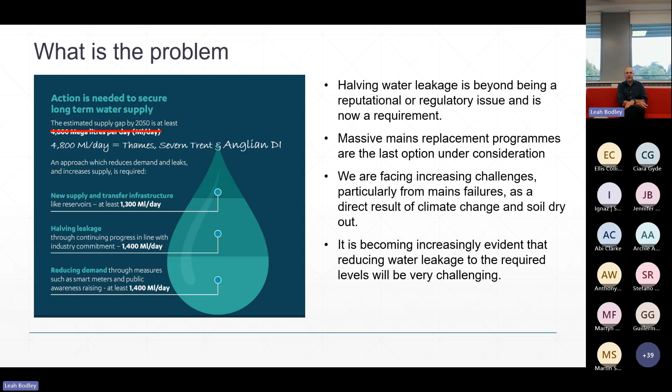We're facing increasing challenges at the same time. So we're trying to drive down leakage, and yet climate change is drying out the soils, and we're seeing massive mains failures in the summer as a result of soil dry out, and in the winter where we're getting winter events coming through. So it's a really challenging time for leakage at the moment. It's becoming increasingly evident that halving water leakage by 2050 is going to be really, really challenging indeed. So how do we do it?

What we try to do is look at all aspects of leakage, and we use the PALM acronym to describe that. A lot of people say, oh yeah, there's a silver bullet for leakage. No, there is no silver bullet for leakage. In order to manage leakage properly, you've got to be able to do all four of these brilliantly.

Stop the leakage breaking out in the first place. Become aware of where it's breaking out, and that may be in a geographic area - it may be on your distribution mains, on your trunk mains, on your storage reservoirs, in your customers' houses. We've got to be aware of where the leakage is actually happening so we can go and look for it. Then, of course, we've got to find it - that's a job in itself, actually locating the leakage out on our mains or within a customer's property. And finally, we've got to mend it and come up with repair solutions.

I often say we still use the same repair solution that the Romans used, which is dig a big hole, cut out the bad bit and piece through.

Our research has shown that most of the work going on, most of the innovation, is actually in that awareness and location area. About 70% of company projects across the country are in those areas. Mend solutions is the area with the lowest amount of research - it's really hard to bring new innovations into that area for a number of reasons.

Really interestingly, our regulator now uses this same PALM analogy. What happened was that when they asked us to put in our PR24, they said break down your costs, tell us how much you're going to spend in each of these areas. By putting those figures together, and these are all publicly available on company websites, we now know that 52% of the leakage spend is actually on repair.

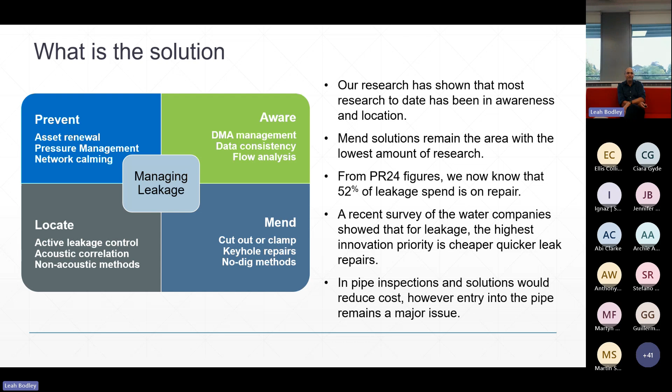I did a recent survey of the water companies and said, look, I want to know what the innovation calls are at the moment for leakage. They went out and came back with a number of calls. I said, brilliant, fantastic, now rank them, tell me which ones are the most important. What was really interesting is straight away, the highest priority came out as being cheaper, quicker leak repairs. We've got to come up with better ways of mending our pipes. So how do we go about doing that?

My son plays chess, he's pretty good at it, and when we play together he regularly beats me. In fact, I can't remember the last time I beat him. What he does at times is move a piece and I think, why are you putting that there? Then about four moves later, I'm suddenly in checkmate and I realize why he did that. It's this idea of putting something on the board and going, I'm not quite sure how this is going to work, but I know that in about four or five moves time, I will need that.

When we look at innovation, sometimes we're trying to solve problems we've got right at the moment, but other times we look over the horizon and say, okay, what are we going to need to solve in a few years' time? What problems are going to be coming up?

When we started doing this, we didn't know what the issue was going to be in terms of leakage and in terms of mend. We started discussing this project a couple of years ago. The UAP is really one of these chess move ones, where we said, a few years back, look, we think repairing pipes is going to be increasingly important to this industry. So how do we help do that? How do we help with the inspection but also the repair and dealing with that side? So we decided, okay, we'll put a piece on the chessboard, we're going to see how this one works.

What's been really interesting is over the two years, a year of discussing it and then a year of actually working on the project, there's been a dramatic swing in the desire for solutions in this area. We've really seen the whole industry turn around and say, okay, we're pretty certain we've got awareness and location stuff now, we really need to focus upon mend.

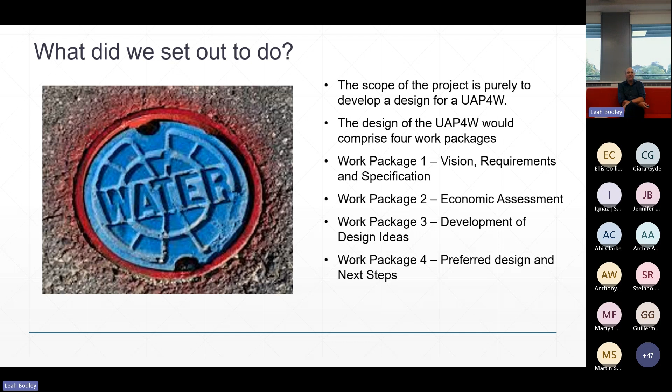But very quickly, have we succeeded? Well, we've completed a thorough needs assessment for the UAP. We really understand what it needs to be able to do. We've developed 4 potential designs. And then what we did is we took those 4 designs and we refined them down. We said, okay, we've now got 2 candidate projects. We've got 2 that we really think summarise what we want to do with this UAP.

We've identified a potential route to market. So what we've been able to do is go, actually, these designs, we can see complementary technologies that exist in the industry that have never been thought of as being useful for inserting things into the pipe in terms of robots and inspection devices. We think those can now be adapted. So we think our work will build upon existing equipment out there and say, look, we can take these, adapt those, and use those within the industry in order to solve this issue.

So we're now going to be entering into discussions with manufacturers, and one of the reasons we're doing this webinar, and we're doing this slightly early because we've still got a few bits left to finish off on the project. But one of the reasons we're doing this webinar now is we want to be able to share this information because we're going to be entering into discussions with the manufacturers.

And what I'm going to be asking them to do is, before we meet with you, is that you review this video. So I'll say it now. If you're one of the manufacturers who we're going to be talking to, thanks very much for actually watching this through. It's going to help our discussions an awful lot when we come there, because you're going to understand exactly what we've done, what the process was that we've gone through, and what the problem is that we're trying to solve.

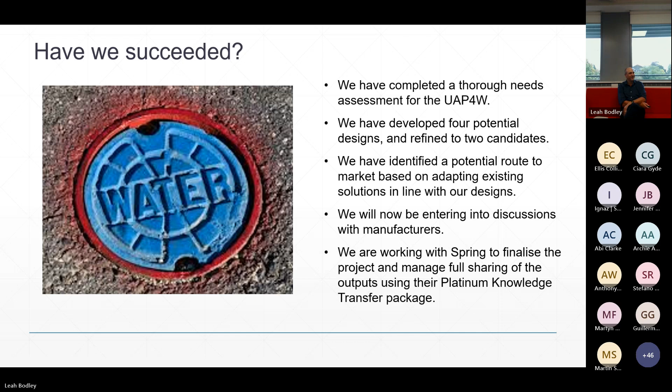We've got relatively limited time today, so we're going to give you a flavour for what the work is like. Everything you hear about and all the detail has been documented in the reports we've produced throughout this work, and they'll be held centrally by Spring. So if you want more detail, that will all be made available in time, and as Jess said, we're just wrapping up some of those.

I'm not going to talk any more about setting the scene, Jess has done that, so we're going to jump straight into the project. We're going to start by talking about current practice, vision, challenges and specification. This is where we started just over a year ago. This project's been running for just over a year, we started back in September.

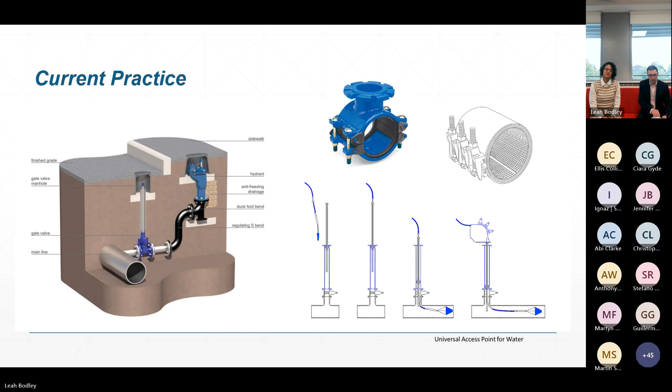As was said earlier, a lot of this project was around workshop and stakeholder engagement. One of the first things we did in those workshops back in October and November was to ask stakeholders - water companies, supply chain, academics, researchers, consultants - what was their vision for a UAP. On the screen I've summarised some of the feedback we had from that workshop.

A really key point made in that first workshop was that the project should focus on the core functionality of a UAP - don't get distracted, don't increase the complexity to try and encompass other devices, accessories, or functionality beyond the core access. Leave that to the suppliers who will be delivering the technologies - they know their technologies, and in future they will develop those additional solutions, whether that's for deploying a technology, capturing a technology, or whatever. So some of the key comments there are around the vision.

So unlike fire hydrants, this should be for use by water companies and their contractors only. It should be low maintenance, easy to install, it should work on compact materials, in a standard chamber size, and it should reduce disruption for customers. Pretty obvious things, but it's a good point to start in terms of a vision.

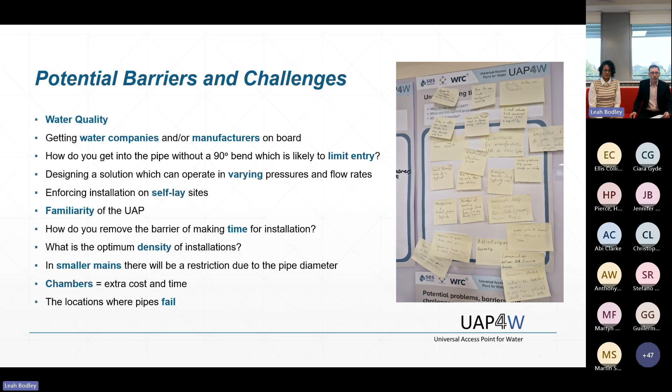As part of this early workshop, we also did an exercise, a MoSCoW analysis, and MoSCoW stands for must-haves, should-haves, could-haves, and won'ts. This is about identifying for the UAP what should be included, what could be included, and what shouldn't be included. We did a big exercise there, lots of post-its. From that, we refined that down and developed a design specification for the UAP.

For each of those items that we developed on that design specification, we had either a preferred and a minimum requirement, or just a minimum requirement. I've highlighted some of the points here, and I'm not going to go through this. This is available, will be available as part of the reporting.

But you can see some of the very obvious things around water quality, Regulation 31, some of the things around design features in terms of the access, the diameter of the access point. Things around installation, different pipe sizes, materials, cost.

Cost was a really interesting one because actually installing hydrants, the hydrant itself is not a high value item. So we've specifically said that the cost should be associated with the quantitative or qualitative benefits that can be derived. I think the wrong angle would be to make a direct comparison with existing technologies. This is about enabling more from the network.

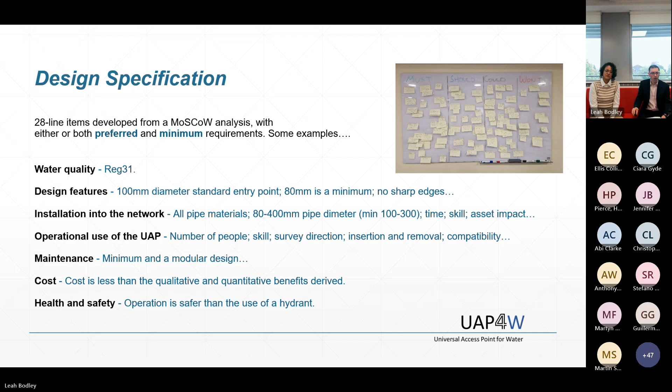I'm going to pass over to Camilla to talk about the economic assessment.

So hello everyone, I'm going to spend the next 10 minutes talking about the economic assessment of the universal access point. I will try to cover as much as I can, however I won't be able to enter into too many details because it was an extensive task. But if you have any doubts, just let me know so I can clarify anything by the end of this presentation.

So the main objective of this work was to provide a comprehensive economic evaluation of the UAP for the water industry in the UK, with the focus on potential benefits, use cases, and demand estimates. Here it was a mixed approach using both qualitative and quantitative analysis for us to understand the feasibility of the UAP adoption in the most important perceived use cases by the water companies participating in these studies.

So here, the first task was the qualitative analysis, which was a mix of surveys and scoring systems in which we wanted to understand and assess the perceived benefits of the UAP in the water sector. Regarding the use cases, we wanted to understand the most important UAP applications.

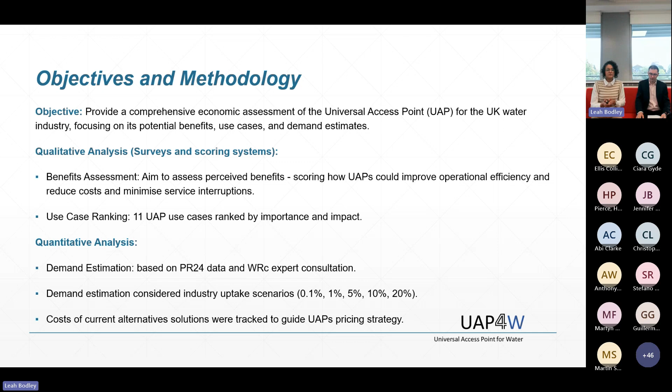Regarding the applications, the use cases, the top three better ranked ones were pipe condition assessment, access for robotic sensors and devices, and network leakage - the installation of UAPs within district metered areas to improve leakage management. The least important use case considered here was for new development.

So the respondents thought that the UAP could have a huge positive impact in the long term, but not really in an immediate perspective.

So why have we done this qualitative analysis? It was to guarantee that the demand estimates, the numbers, reflect a real world industry priority and are rooted in actual needs. We didn't want our UAP demand numbers to be just rooted in hypothetical situations or a very rooted analysis based purely in modeling and calculations. We wanted to bring the views of the water companies into the methodology for this calculation modeling.

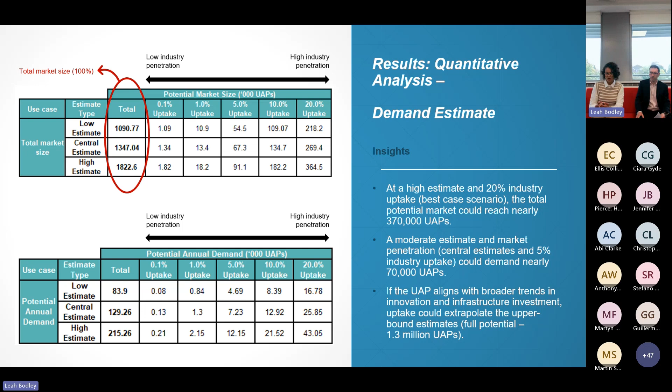So we have here just some conclusions drawn from these two assessments. First, we can see that the use cases related to proactive maintenance in distribution mains were perceived as the most important applications for UAPs, and together they account for nearly 68% of the total market size.

This tells us that we have potential for moderate to high adoption of UAP, especially if it aligns with good market conditions. But of course, adoption will depend on competitive pricing, especially during early stage deployments. So it's important to benchmark the UAP against the cost of alternatives raised in this study.

We've noticed also that the perception of UAP benefits varies across water companies, reflecting different operational needs. So we need to keep talking to the water companies to guarantee that their specific needs, or at least the most common ones, are covered in the final design.

As the qualitative study told us, priority should be given to high impact areas such as pipe condition assessment and leakage management. As a next step, consultation with future UAP suppliers and stakeholders is needed to refine the design and to set up a pricing strategy.

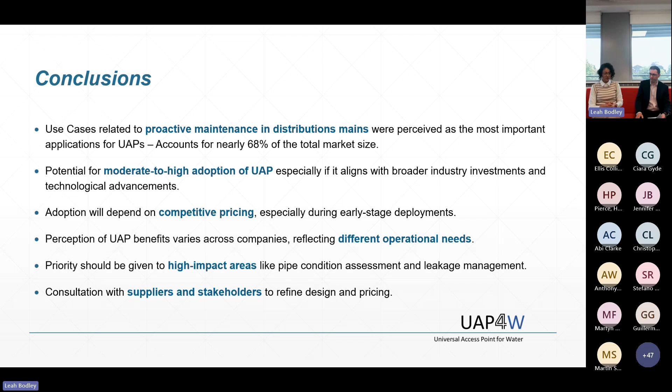So we're now going to talk about the main part of the work that we've done, which is the development of the design ideas. I've talked already about stakeholder workshops and engagement of a wide range of different organisations and people. I wanted to make the point here that we actually involved quite a few graduates at WRC, relative youngsters to the industry.

It was really refreshing, the alternative, challenging thinking that they brought to this. I think sometimes we forget that we know an awful lot about the industry and we're a bit blinkered. So a key point is that people who don't know about the industry come with fresh ideas that can be really useful to this sort of idea development process.

So the objectives for our design development work were to develop a number of design ideas based on the specification, and engage with stakeholders. WRC developed the initial ideas, but this wasn't about WRC just developing ideas - it was about stakeholders reviewing, challenging, scoring, and ultimately agreeing on the aspects and the designs that we would take forward.

I'm going to talk through the 4 ideas that we developed to an initial stage, and we're going to go through each of those in turn now. There's a slide on each of them. They're all a bit different at this stage. Remember, we're coming up with different ideas - we're trying to challenge the norm, trying to think of different things to do.

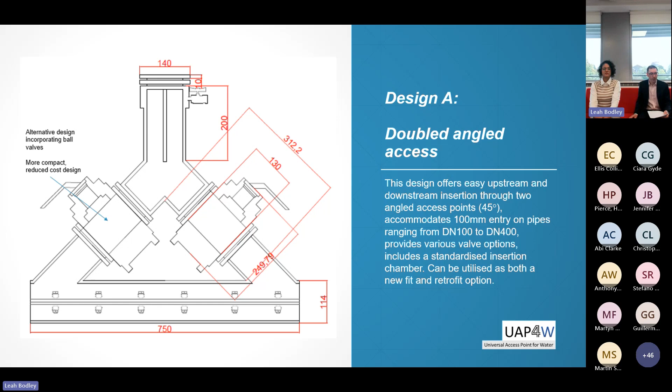So, design B. They're completely different.

This design is based around actually putting a slot on the crown of the pipe along the pipe, and then using a ball valve and using the central hole through the centre of the ball valve to provide some directional capacity, either upstream or downstream of the pipe.

This provides some direction. Again, this is shown as a repair clamp type design, but like all of these designs, they could be manufactured as a piece that is cut into the pipe with flanges.

Some of the key points that were raised in discussion on this one: how do you make the slot under pressure? That was one of the challenges and one of the questions, and something we did look at later in the project, which I'll cover in more detail. Concerns over putting that type of slot, that type of access, on PVC or AC pipes.

Installation, again with the slot, would require specialist training, and there was a very valid point around a ball valve may not be considered suitable, and you may need a secondary valve on top of that for long-term deployment, or some way of locking it off. The ball valve wouldn't be considered as appropriate valve type.

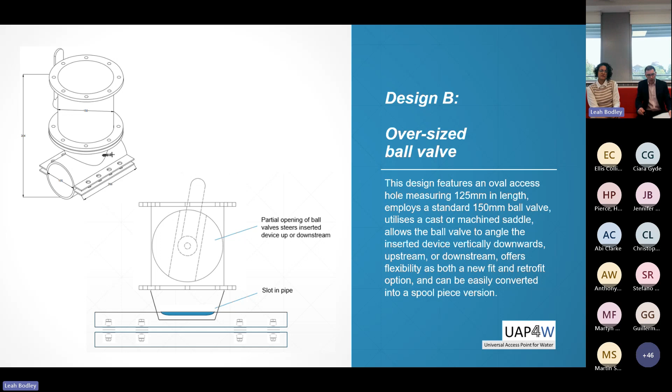So that's design B. Let's move on to design C. This one, again, quite different. This one focused very much on the issue with a cut edge.

So if you tap into a pipe, if you drill out a pipe, you end up with a very sharp edge on the host pipe. How do you deal with that? This approach, again, is shown as a repair collar type approach, but it has a sleeve that goes down and protects whatever you're going to put in from that cut edge.

This design here has a valve that sits on top of the sleeve. It also shows some potential optional tapping locations.

Some of the feedback we had on this design: small, simple, people liked that. The valve needs to be bespoke in this current iteration, so there are some modifications needed to the valve.

The tappings, people thought they probably weren't needed, and a very valid point: the sleeve that is put in, which would be metal, potentially stainless steel or bronze, protects the pipe. If that is a cylinder, in essence, when it's inside the pipe, the internal arc or curvature of the pipe means you have got a flat edge in a curved internal surface, so potential turbulence, potential disruption of the flow within the pipe. So some further thoughts are needed on this design.

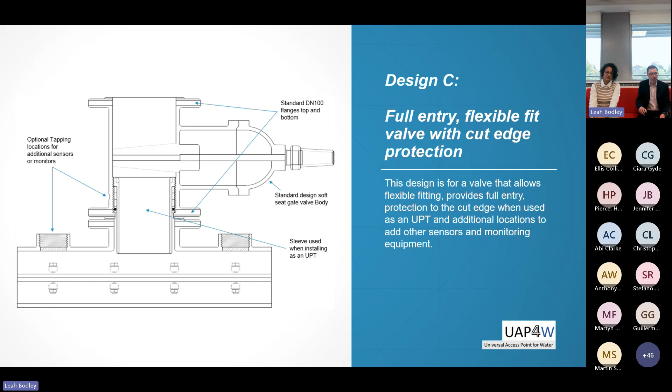And the final design, which is a bit of a modification of the two previous ones, was a directional valve which included cut edge protection. Again, you can see from the diagram, it shows a sleeve that is rotated with a directional handle. This again shows a repair collar type design, which would bolt around the pipe.

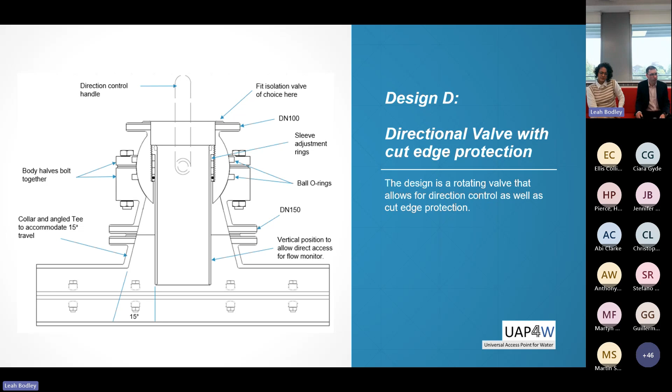Some of the comments about this design were: you've got some dead water in there, potentially creating turbulence. With a deep chamber, the actual angling of the device may require quite a large chamber if you're at depth. It looks bespoke, it looks expensive to manufacture. There's no air valve, and it looks like quite a lot of development work. I think you can get the gist of the view within that workshop on this design.

So we can summarise those, and part of the workshop was assessing these ideas. We broke out into groups, mixing people up to make sure all voices were heard within those workshops. Each of those groups assessed and reviewed each of those designs, and I'll show a bit more detail about that in the next slide.

What you can see here is, at a basic level, designs B and C scored almost identically, but they stood out as the two designs that people felt had the most potential at this stage to take forward. Interestingly, one of the groups really liked design A, but the majority didn't.

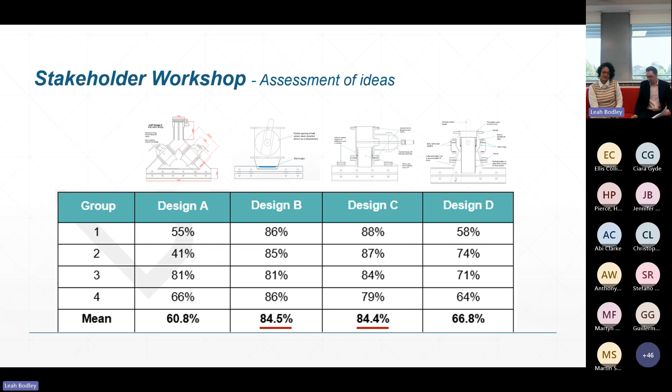We can look at these results in a little bit more detail. The idea isn't that you can see all of the detail, but four designs here, and what this shows is an assessment of the designs against our requirements specification. We're assessing them against each of those lines in our requirements specification, and the green and red bars show whether those who attended the workshop feel this design either meets or has the potential to meet that item on the design specification.

Green line means yes, they are confident that it could meet that minimum requirement. Red line means actually we're not sure or we don't think it can. And what you can see here is that B and C have more green than A and D. There are significant areas still of red lines where the stakeholders still have some doubts and some concerns whether those designs could meet the minimum requirements of our specification. And those are primarily around the more operational aspects of our design.

I think a lot of that was to do with, this is an idea, and we are many steps away from an operational prototype or a design that can be actually tested. So there was a lot of uncertainty there, but there were some key aspects that needed to be taken forward in those two designs.

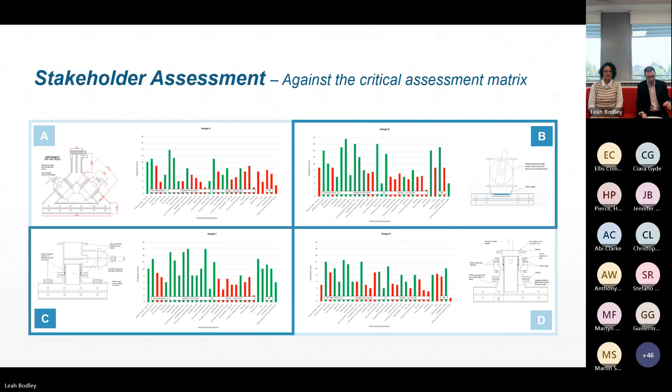So, recommendations. Our recommendation at this stage in the project was designs B and C. So design B is the oversized ball valve, and design C is the cut edge protection, should be taken forward as preferred designs. We said originally in the project we would take one design forward, but actually we felt that there was value in taking two.

There is some work to do on those designs around the diameter and the access around 80mm pipes, which are the majority of the pipes within the distribution network. They should both be taken forward in two formats, both to allow for live repair, insertion, but also flanged fittings that can be used for cutouts where you have no flow or on a new main.

And finally, some of the design features and considerations which were really highlighted in the workshops were around, as I said, operational aspects, maintenance, Reg 31, those sorts of things needed to be considered further.

The two designs that we parked at this stage, A and D, we wouldn't take them any further, but they're all well documented and they could be picked up by the supply chain in the future. There may be certain aspects of those that people think are useful to take forward, so they are not lost, they are documented for the future.

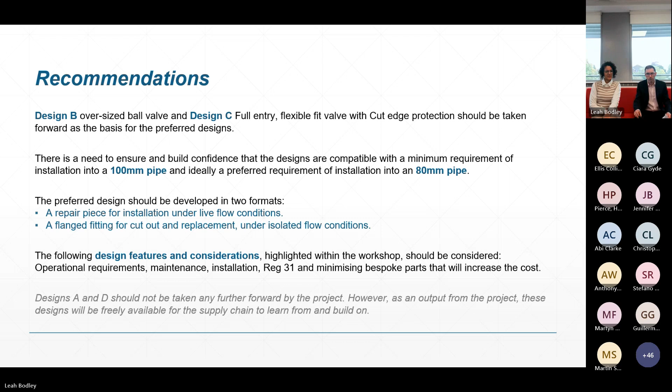I'm going to move on and talk about the final bit of work that we've been doing here, the most recent bit of work, which is around taking those two ideas and refining them into the outputs from this project. The objective of this work was to refine those down to a single preferred design to take forward.

As I said before, actually, and I hope you can understand, these are quite different designs. They're actually coming at this problem from different angles, and actually they're quite brilliant, they're quite useful, and we felt there was value, and we have the capacity in the project to take these both forward and develop them both, which I think added value to the project.

So we'll talk a little bit about how we've taken those forward and how they've evolved. Now, obviously, relatively short amount of time here, I'm going to show some pictures and talk you through them. There is an awful lot more documentation that will be published within the final outputs from the report. A lot of the detail will remain in those. But hopefully I can give you a flavour for what we have been doing.

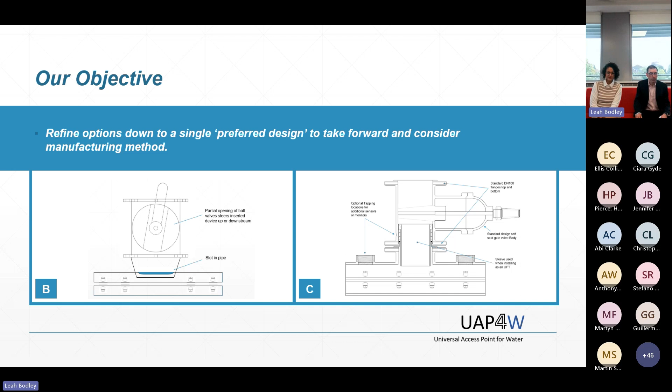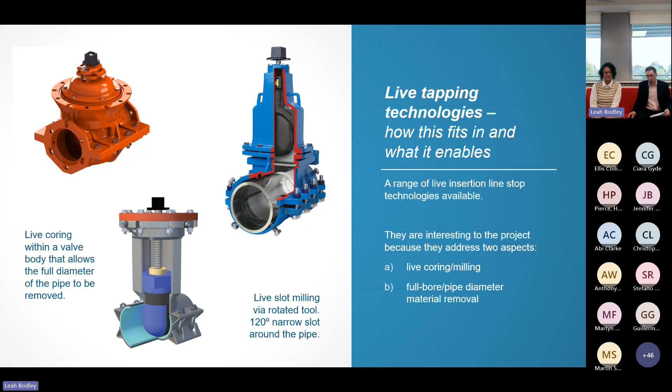So, with not an awful lot of time left in this session, I'm going to talk about the two designs that we have left. So design C first — this is the one with the cut edge protection.

The design evolved following the stakeholder workshops. Some things that were really focused on were ease of manufacturing, cost and installation. There was a real emphasis on pushing the directional control aspect to the manufacturers of technologies that would be deployed, so we weren't going to look at the directional control, but we were going to see how we could manufacture this and how it could be installed quicker. We rolled back from the bespoke manufacturing, so you'll see the valve is now a standard valve, with no bespoke manufacturing.

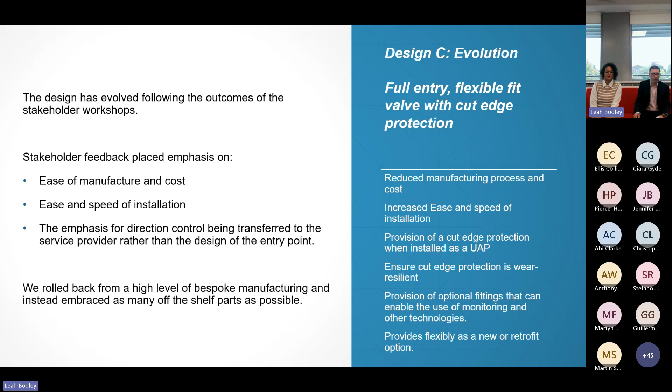Some diagrams here — I know you can't look at all the detail, and we haven't got enough time, but all of the detail is within the reports. We've got two variants of this design. The key aspect within this design is... let me just find my notes.

So we have a sleeve housing, which is the pinky type in the blue box in the middle, the pinky type bit of the design. The yellow is actually the sleeve that protrudes down into the pipe. We then have a valve that sits on top of the design, which is a standard valve. We then have an insertion housing and a T-bar, which is used for under pressure insertion of the sleeve. Lots of detail there — I'm not going to go through all of it at the moment, but you can see that it allows for an under pressure insertion of this sleeve once the coring has been made.

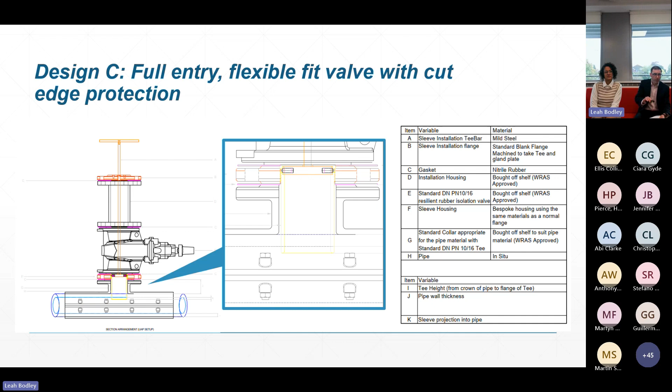We have worked through each of the design aspects of this. If I look at the next slide, you can see a slight modification. This one shows the sleeve housing, but with a greater depth, which allows for monitoring points — access into this. Essentially this is a round structure, so you can put as many monitoring points as you want. You could have air release, you could have some sensing — all sorts of things added onto this design. But the other aspects, in terms of the standard valve that bolts on top and the access chamber above that, are completely standard.

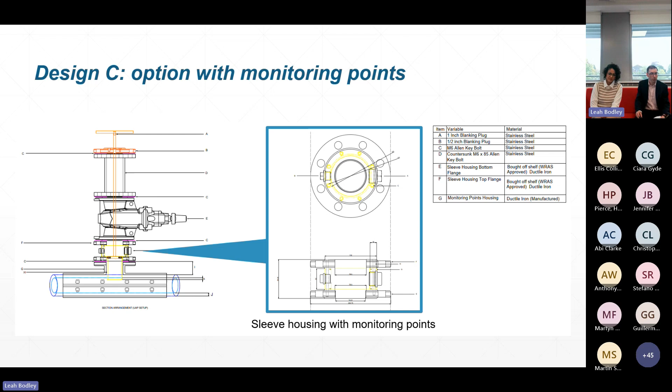This design can be modified for the whole range of size applications that we've been looking at. The challenge is always the smaller sizes — the 100s and the 80s are the more challenging applications. But this has been evolved, so it will work at the smaller sizes. Some of the individual components — the sleeve housing, the installation housing and the T-bar — are relatively simple components that could be made at relatively low cost.

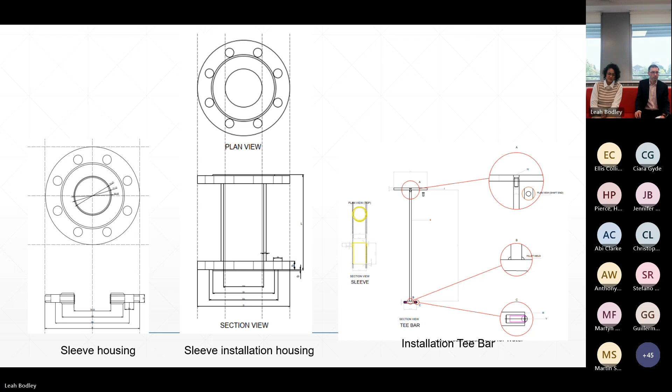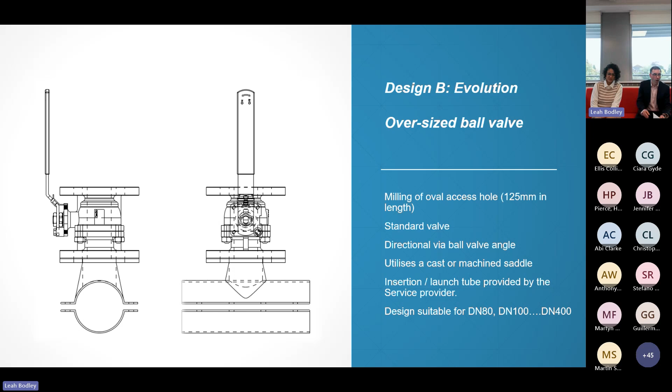Lost the presentation — we're almost at the end. It's all right, I can keep talking. So this design...

can be used across the range of sizes from DN80 up to DN400. Slight modifications to the design at the smaller sizes — it becomes, again with all of these designs, slightly easier at the larger sizes.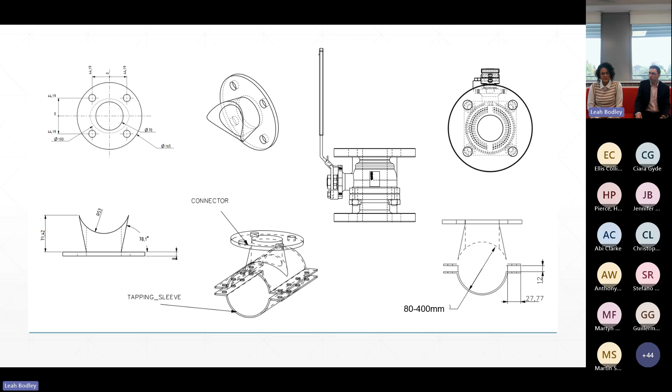So I just really wanted to wrap up with two final slides. First of all, in terms of output, we've developed two different designs. They've been documented, to a stage where a manufacturer can pick them up and start their design work. They cover both the repair piece and the flange piece. The other two designs, developed to a lesser stage, are also ready for people to utilise.

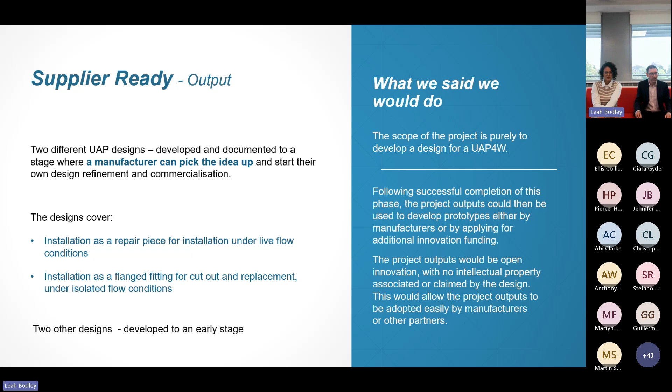Finally, a key message we learned along the journey is that manufacturers of this sort of technology have their own way of doing things and taking things forward. They may be specialists in using certain materials, have certain ways of value engineering things, and certain preferences in addressing different market sizes. We're not experts in that, and it would be wrong for this project to go any further than it did. So we were exactly right in deciding where to stop this project and hand over to the supply chain. Those bullet points highlight the sorts of things we would expect and think will need to happen next.

So there'll be further design directed by market size and cost. Some of the detailed modelling, the finite element analysis type modelling, needs to be done. Prototypes need to be developed, tested and refined. There'll be approvals, and some of the work that Camilla talked about will need to be refined, along with some of that economic assessment to see the market size. I think that is the final slide.

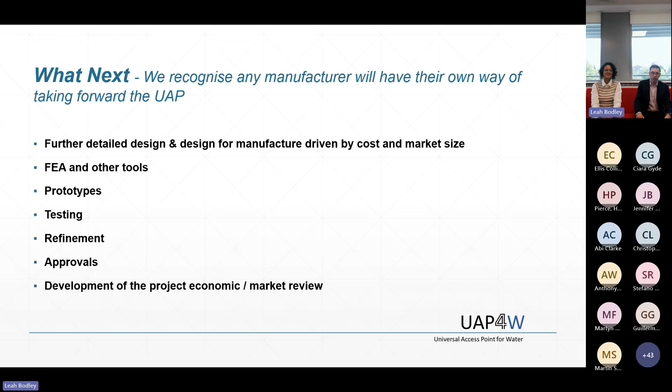That's been an awful lot of detail, I appreciate, in 40 minutes, but I'll say it again, everything is documented within the reporting, and Jez and Mark will be out seeing suppliers, so please engage with us.

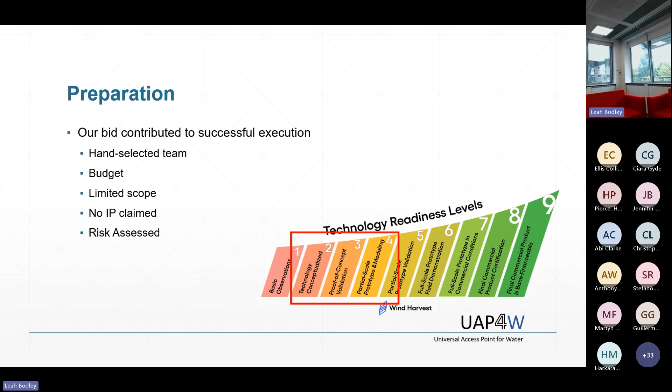So what really went well in a nutshell, we were all outcome focused. We had a shared vision of what we wanted to do, how we wanted to do it, and that really was born at the bid stage. The team was instrumental, as you might imagine, but amongst the experience and skills, people like Camilla and the rest of the team from WRC brought in some new ideas and really challenged our thinking, which was fantastic.

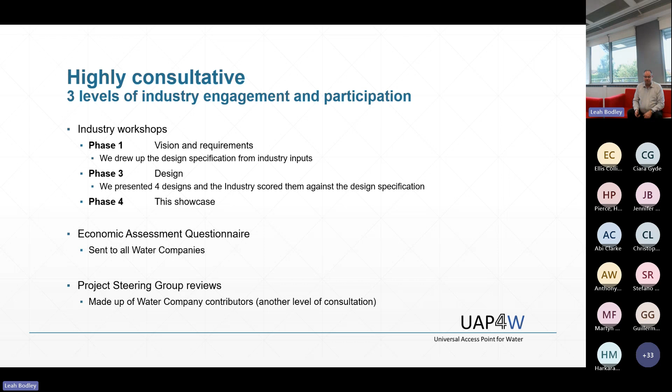And lastly, we talked extensively and openly. We had no IP, so we could talk openly. We listened intently to what we were being told by the industry, and we considered it and processed it. As was said before, we used the MoSCoW analysis to get all of that wealth of information and structure it in a way that we could use to create the design specification that Leo talked about.

So then the thunderbolt came, where we learned of the line stopping technologies, which on initial assessment we agreed that we would pause what we were doing. It led to a chain of events where we researched the technologies that were out there, and we evaluated them against our specification, and ultimately we changed the way we were going to finish the project.

Leo talked about there being two designs going forward, and assessing and talking to the manufacturers of these technologies, which we universally agreed could lead to cheaper development of the UAP. It's a modification rather than new product design. It could be quicker to market because of that, and the industry would end up with one fitting that serves multiple purposes.

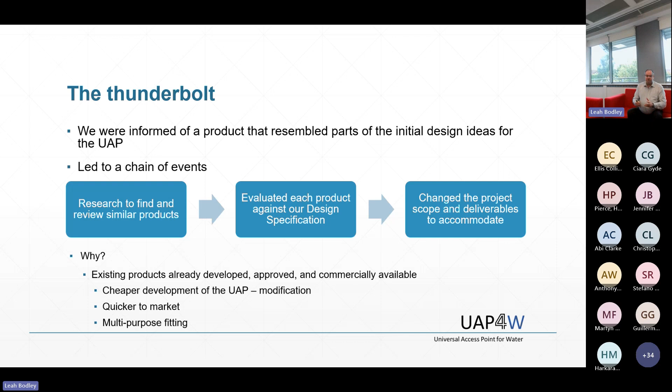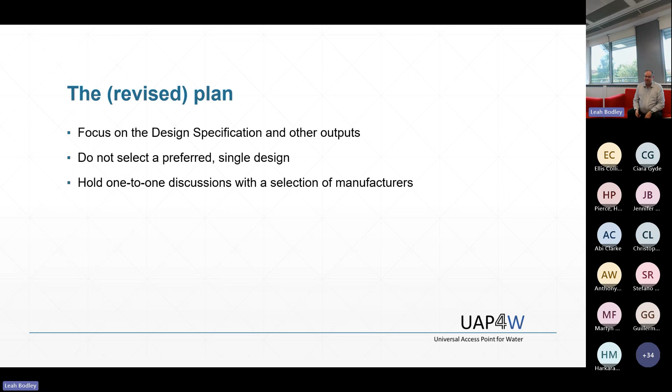So the revised plan was really to focus on the outputs of the project, the design specification, or the reports that Leo's spoken about. That was key moving forward. That we wouldn't select a single design, that we would present our two designs, design B and C, and these other technologies. And we would then hold conversations with those manufacturers to help them understand the outputs from our project and help them hopefully take it on board.

So no project works really well from scratch. What went wrong? Time. We were a bit ambitious to think that we could do all this within 12 months. We started a little late, later than planned. We hadn't taken into account that we were approaching the summer holidays, so we ended up starting in September rather than mid-July. We've caught up a little bit on that, but not entirely.

It's a small project, and we had all sorts of different things happening to the team members, which I won't bore you with, but each of them had a small effect on progress. It only takes one person to be out, and progress is disrupted.

So the other point really was the economic assessment. We delayed sending out the questionnaire because we recognised that the water companies were preparing their June returns for Ofwat, and we didn't want to be asking them for an awful lot of information and data at the same time. So we delayed that, but that gave us an opportunity to refine the questionnaire and make sure it was really focused on what we needed.

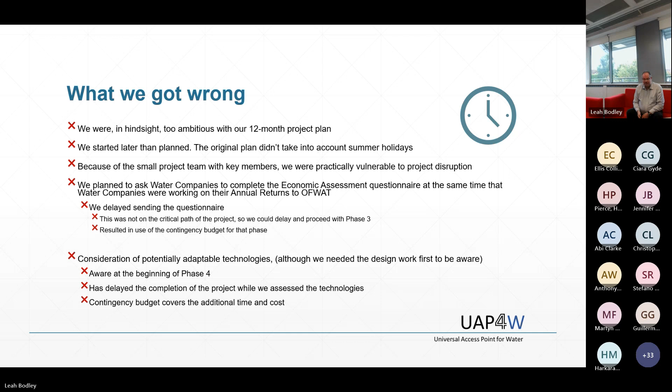So in summary, we got the budget right. That was fine. We had a small contingency budget which was there to help us. So that worked really well.

Time was a bit of an issue. We're now three months after when we should have finished, but we started two months late, so that kind of explains that. But because we've produced the two designs and potentially we have that quicker way to market through the modification of line stopping technologies, we believe that the outcomes make that worth it. Thank you very much.